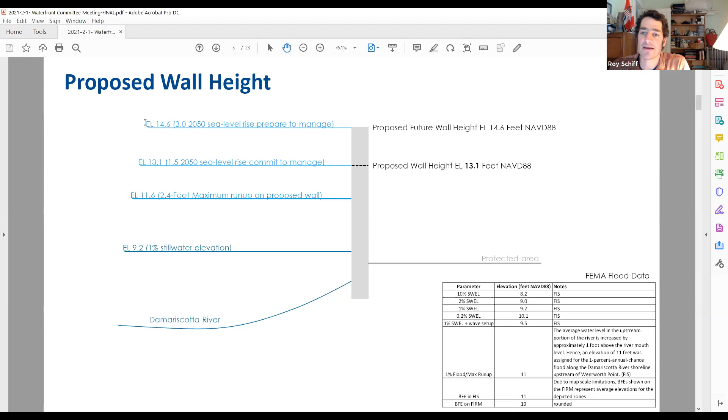And then finally, we have elevation 14.6, and that's a 3-foot sea level rise, the high level for 2050 prediction. We've talked with Pete, who's on the phone, as well as others, and these are the management levels that the state of Maine is looking towards adopting. So our thought is that maybe the wall could be extended to that height.

Okay, next slide. So there are many requirements to building a wall, and I wrote the word levee in parentheses because in FEMA world, we're actually building a levee. Not that we anticipate it being an earthen embankment, but because we are designing this structure to remove the downtown from the special flood hazard area. It's a logistical definition, and because of that, we have to meet all of the criteria listed on the right-hand side of this graphic.

So everything on the left is the same. And what you see is, for example, that we need to be 2 feet above the base flood, total still water storm surge, and wave setup, and that's 11.5 feet. So we meet that criteria.

The highest criteria we need to meet is 1 foot above the maximum base flood run up on the wall. So that is 11.6 plus 1 feet. And then with just a little more elevation, we're actually at a 2050 sea level rise scenario that the state of Maine is going to adopt at 13.1 feet. So what we're seeing is this sea level rise scenario really gets us to all the top of the levee and the freeboard requirements that are required for the wall we're proposing.

Jason, if you can go to the next slide. And on this slide, we just highlight the 2050 and 2100 sea level rise elements. This shows that in 2100, this wall could be overtopped if these predictions that the state is considering play out. But if we go with a...

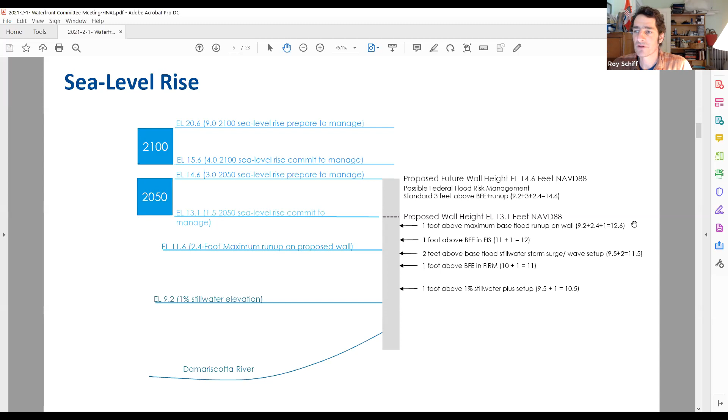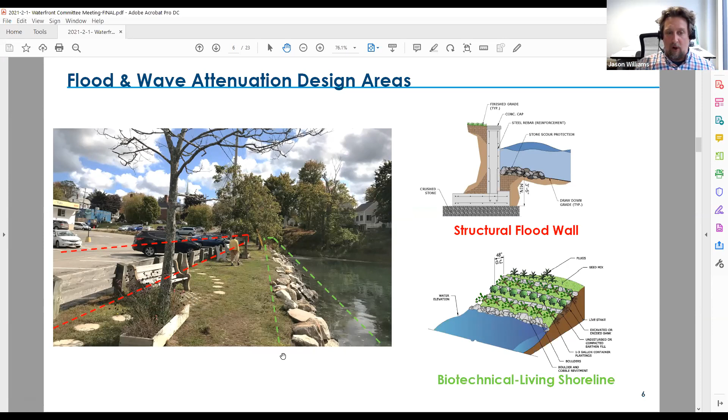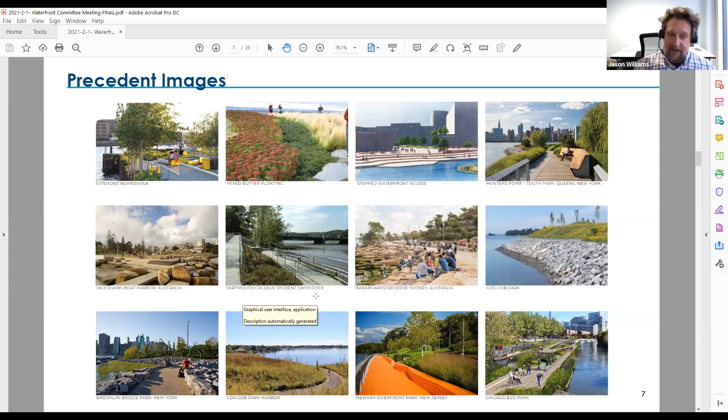Oh, let me try that again. Oops, I'm out of memory.

In all three concepts, we're thinking about how pedestrians are potentially getting to the waterfront. So as somewhat of a baseline, we're using a center line drawing off of Taco Alley and people moving down, also identifying that people could be coming from the west or the east to access the site.

In concept number one, pedestrians coming down Taco Alley enter a small gateway plaza with the relocated or a brand new wayfinding kiosk. As part of this concept, we'd be taking 3 parking areas to create this pedestrian-safe access into the new parklet, but modifying some parking on the eastern edge so that we can create essentially 2 new parking spaces and add a walkway that gets pedestrians onto the area.

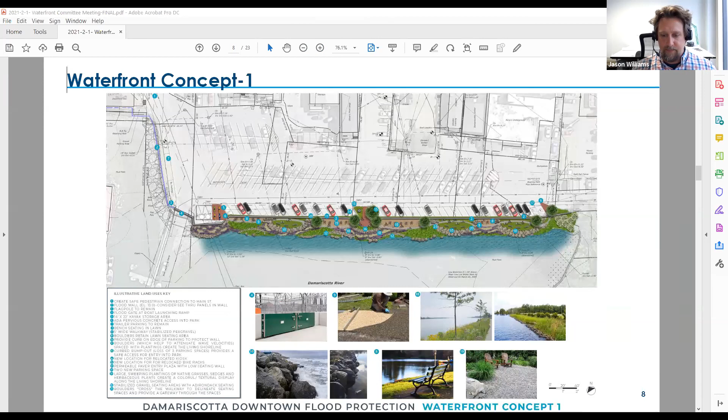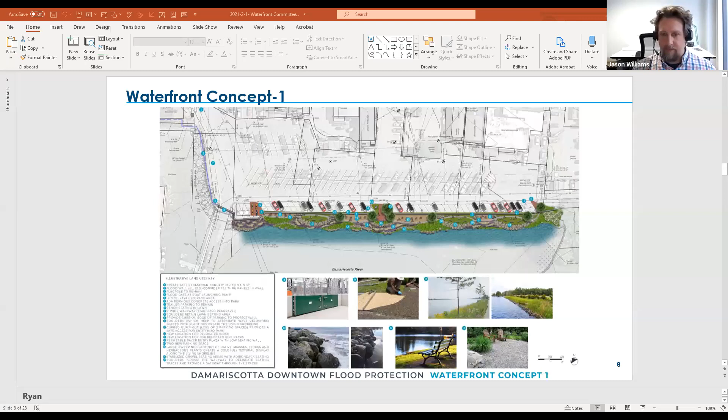So this concept is a really organic concept. It has a lot of movement running around along the shoreline and is primarily made up of an interior walkway, the gray color identified as 9, that meanders along the entire space.

In this concept, we're creating a 3-foot wide lawn snow shelf between the bumper of the car and our proposed flood wall, identified as number 2, which runs along the entire edge of the parking lot.

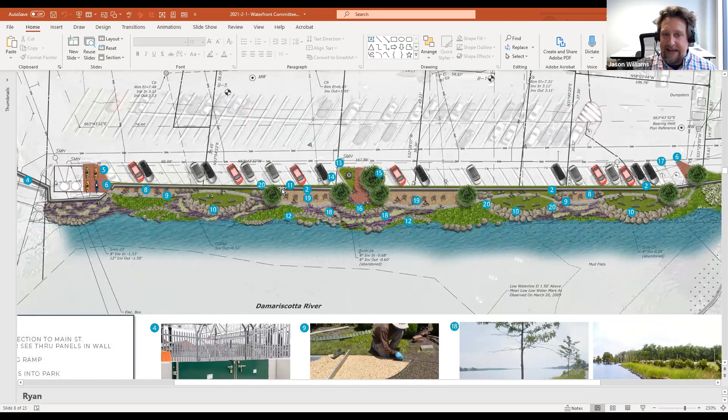The walkway meanders through our parklet and creates essentially 2 different types of seating areas, identified as 19, which would be an Adirondack style seating area made out of stabilized pea gravel, and then open lawn areas that would include benches and picnic tables, very similar to what we have now.

The lawn areas are retained by boulders. You can see here in these pictures, we took some of the design elements of boulder stacking that you see in many situations in New England and wanted to incorporate them into what is now just a boring, low habitat riprap slope.

By bringing in boulders and not going beyond the existing surveyed edge of the existing riprap, we can use boulders to help elevate some of the seating areas, but also some planting areas, almost a lower level littoral shelf where we would allow water to infiltrate in, bringing people closer to the water.

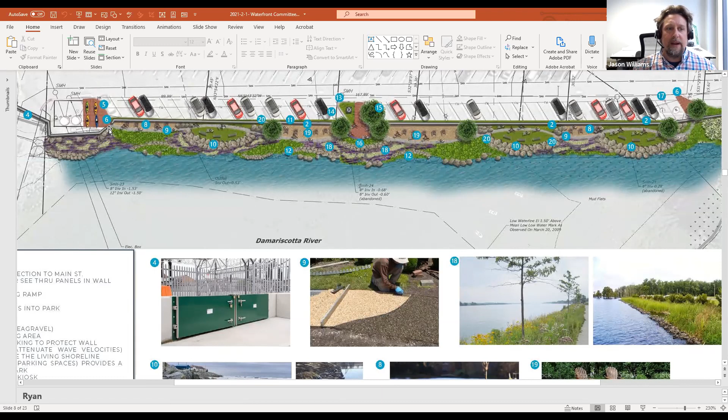Throughout this area, we'd have all native plantings. On the western edge here, we have a new location for kayak storage.

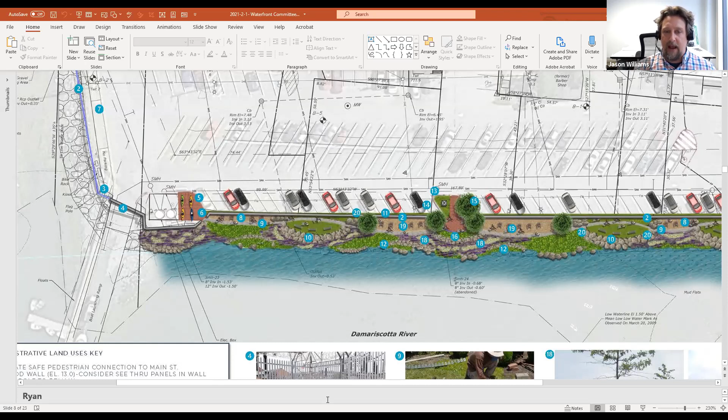Our wall comes around our existing sewage facility with a gate that would go across the boat launching ramp, and our wall moves up along the existing riprap to the north. We'll get into some of the options for that in a bit.

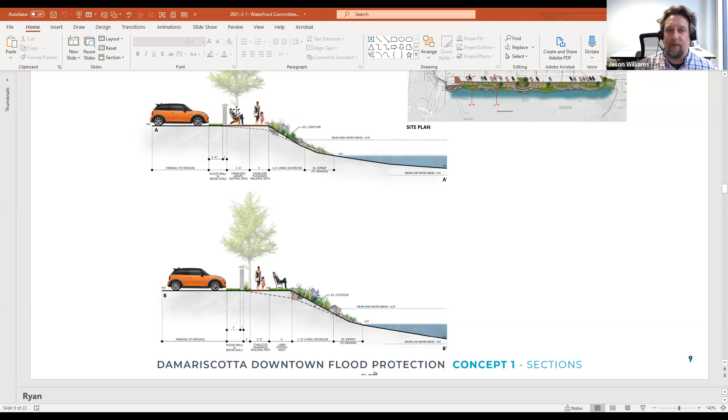If we look at some sections in 2 areas: the top area is the Adirondack seating area just against our 5-foot wall with the walking path in front, boulders retaining our new living shoreline. And our wall and snow shelf with our walking path just beyond, next to the wall, with our bench and picnic table seating area along the water. So as you're walking through this park, you're experiencing 2 different types of seating areas and features.

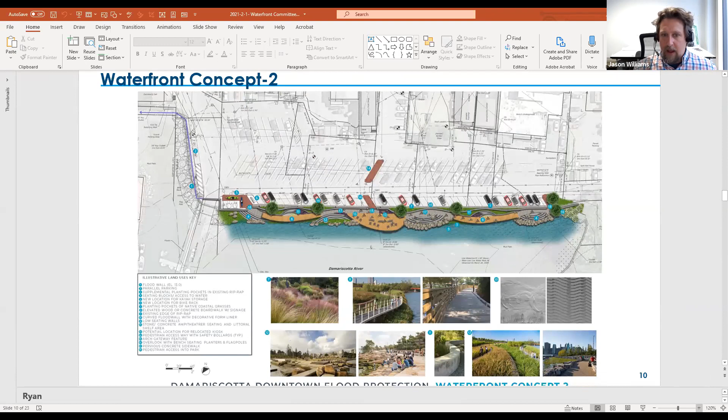If we go to concept number 2, we essentially go from concept 1, which is kind of beginner level, now we're moving into kind of intermediate where we're upping the game a little bit. Again, centerline pedestrian access across 2 parking spaces, which we would take for pedestrian access.

Have textured or colored concrete or asphalt in this area with safety bollards that link people over through another parking lot to an open cantilevered deck area.

This landing area would have an arched gateway area into it, and then identified as number 13, our new location for relocated wayfinding or kiosk, and this really large decking area with different seating elements and flags within it.

In this concept, you can see our wall is curving a little bit, so we add a little bit of movement to the wall, bringing it into the space a little bit, which allows us to create some planting pockets on the parking side of this wall. One, we could help screen the long wall and get some tree plantings in there.

Our pathway runs east to west throughout the park area and goes through stabilized pea gravel or stone dust and moves into these boardwalk features.

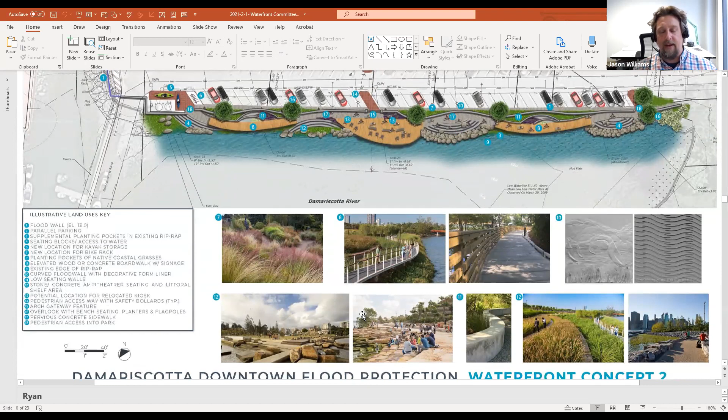And again, we're going to leave you with all of these plans so that everybody on the call can go in and zoom in and see the different elements.

Additionally, just beyond the boardwalk feature, we have a series of small seating walls where you can go and sit just behind the boardwalk as people are moving along the boardwalk and then access down. New kayak storage, our gateway, our gate going across the boat launching ramp, and our wall to the north.

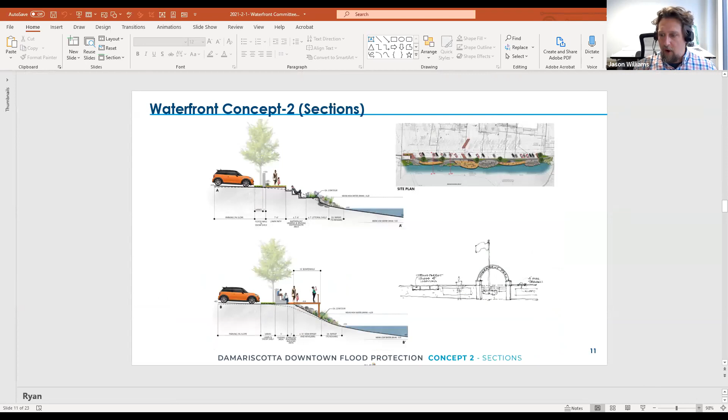Two cross sections that depict the different areas that you'd be moving through with our upper walkway and terrace steps going down to our living shoreline, as well as the seating element that's integrated into the flood wall with a walkway and our cantilevered boardwalk section.

Now on the right-hand side here is, I think, a really interesting perspective. I had mentioned our gateway arch feature and our flagpoles. We would have our interpretive signage at this point.

But again, remember, if we're starting at approximately elevation 8 and we're building up to 13, we've got a 5-foot high wall. Now, there's two ways at looking at this. Currently, you're in the parking lot and you're walking behind cars, and you can see out to the water. You can see the back of people sitting on the benches. And so there's a real integration visually with the parking and our linear park.

Once a 5-foot wall comes up, it's going to make a very clear distinction between vehicular use area and pedestrian use area. Now, we can explore what that means. Positively, if you are in the waterfront park, you're not seeing shiny cars and bumpers and lights. You're really integrated more with the river than with the vehicular component.

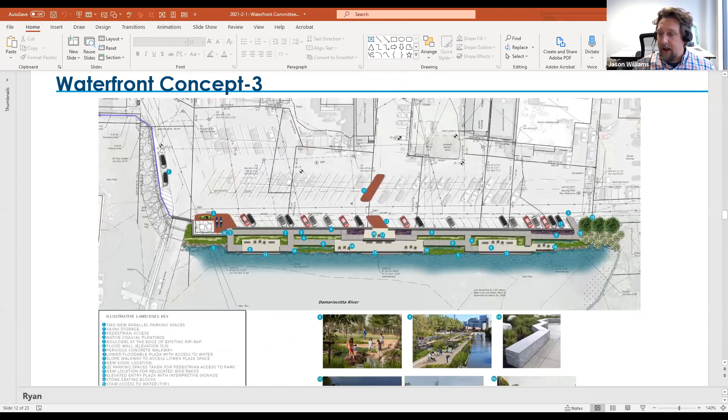Concept 3, again, now goes into a really higher level. In concept 3, we use the same elements of pedestrian safety to get people clearly onto our linear park. We have a straight section of wall that is just beyond the bumpers of the car. So we've removed that 3-foot snow shelf to gain us a little bit more room.

Concept 3 includes a series of level platforms at varying elevations with walkways that move between them on slopes. Because we have such a long expanse here, we would never need handicap railings on ramps. They'd be very, very gentle slopes.

And I just want to show you down here this illustration, item number 9, that shows essentially what concept 3 is getting at, where we have these large opening spaces for gathering and seating, but then these walkway features that move up and down the coastline.

What's really interesting about this is if you do come into our main plaza here, you're overlooking another plaza. If you move to the east here, you're walking down a very gentle ramp in between the wall and vegetation. So you can imagine this vegetation could be a native grass coming 3 or 4 feet up. So you're immediately immersed in the living shoreline.

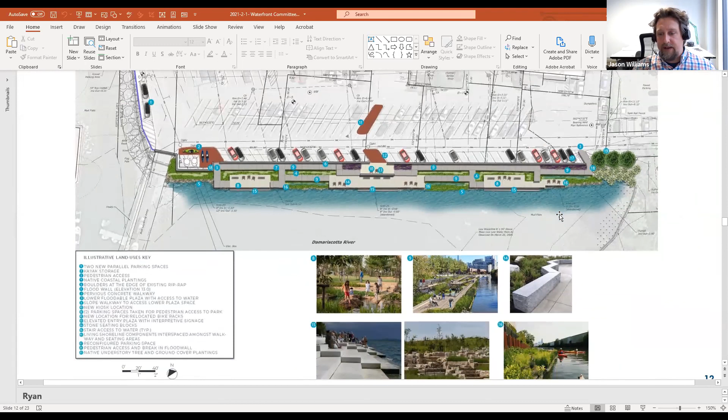For concept 3, we developed an elevation that really gets to the different grade changes. So on the center line here with Taco Alley, you'd come to a main plaza with seating, and walkways would move you down to these additional seating areas. There's a total of 3 of them with steps that you can sit on that go right down into the water. On both sides, the anchoring of our littoral shelves.

And as you can see, our wall element gets taller as you move down. And this provides the opportunity for concrete form liner that could have imagery, whether it's sailboats or a school of fish or whales, that when viewed from the water would be really, really striking.

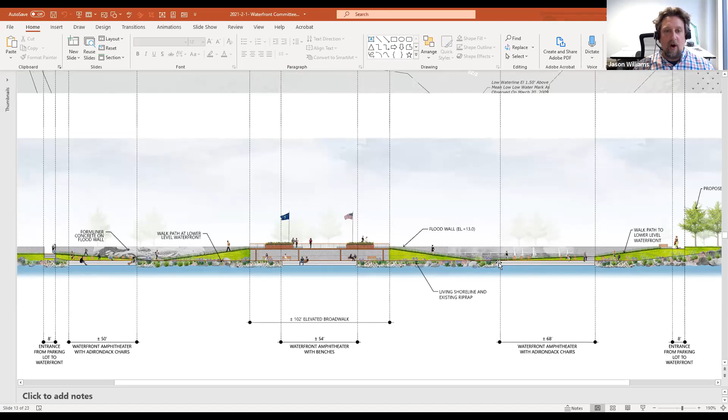And so by modifying the change in topography, we are really getting as much space as we possibly can in this linear park feature here.

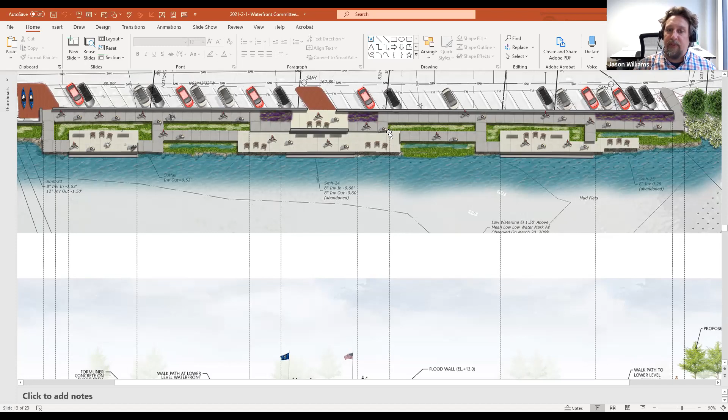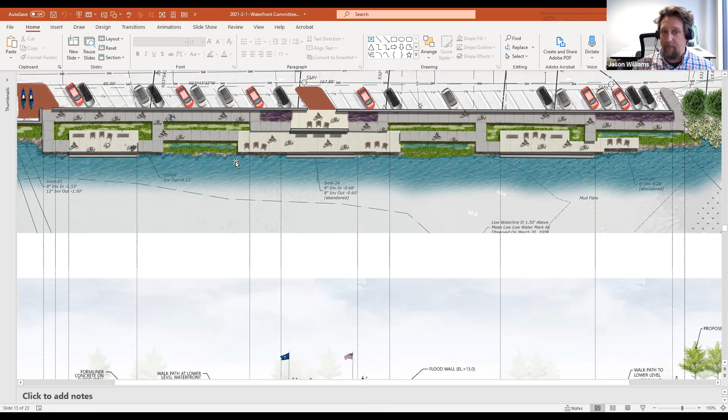One of our thoughts for the plaza spaces would be that all of the piers would be installed on site, and these lighter colored plaza areas would be made up of precast concrete panels that would be delivered to site and craned or placed with a large excavator onto the structural members to support the plaza features.

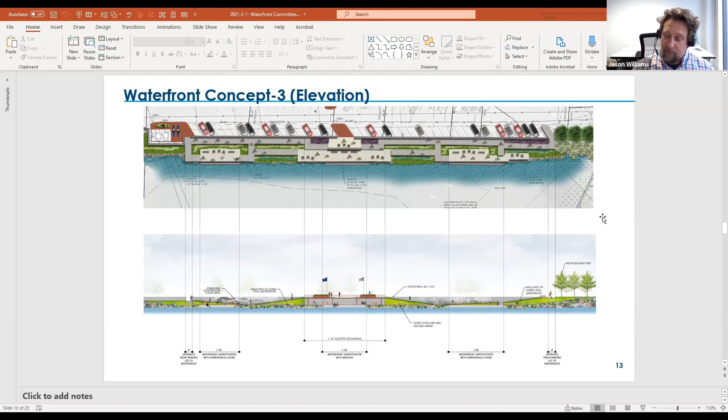There are a lot of elements in all of these concepts. I think the best option for review and comment is to leave these concepts with you, because after this presentation we really need to hammer down which concept we'd like to go with and start moving toward a more refined design and regulatory process.

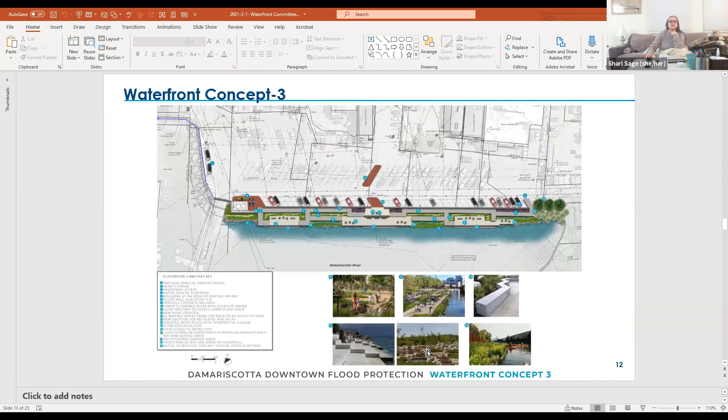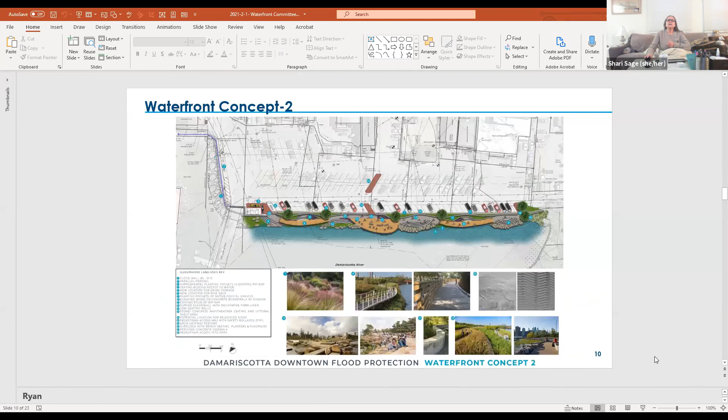Going back to the beginning of the presentation, when you had 1, 2, and 3 design elements, it looked like the first one and the last one had the edge right up to the riprap, yes, more accessible maintenance of this currently already established, plus the build on with the boulders. Number 2, though, with the boardwalk, seems to, from the side image...

Next one, there you go. Down through, I don't know if you can see my pointer, the lady taking the picture. It looks like you're having a bit of - you're inhibiting rather the access to the riprap, which would probably be a bit more expensive to maintain and repair if needed. So I'm leaning towards more the first one or the third one, because I don't want the future expense of having to do something trickier with the riprap.

Okay, great. And also, if I can ask, do you have an approximate percentage? You said the first one is the most cost effective, then the middle one, then the third. Do you have a ballpark idea of how much more it would be to go from 1 to 3? No, we haven't done any cost estimates. But that is something we're going to be looking at.

So there's a lot of factors, and I don't want to get too hung up on costs. But anytime we're adding structural elements into the plan, there's the added cost of excavation, potential coffer footings, and things like that.

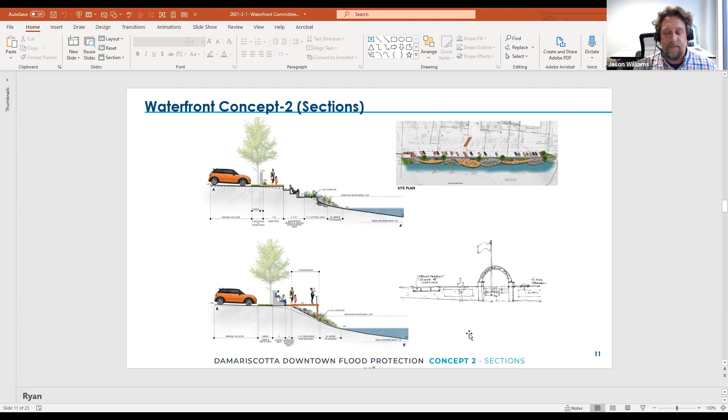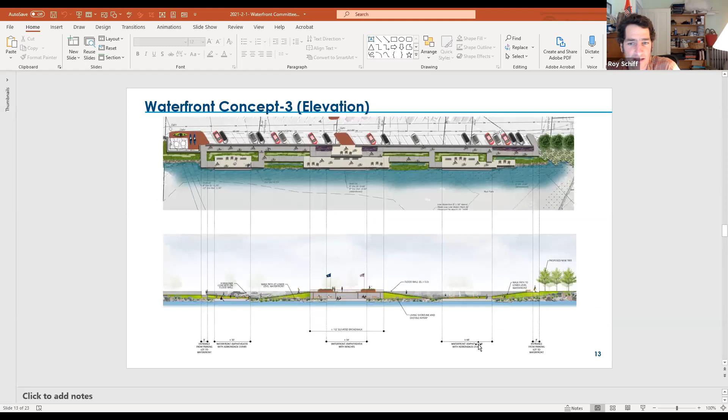Jason, this is Roy again. Not to interrupt, but I think something we always discuss is that you can choose a concept, but you can also pick elements from each concept that resonate with you, and those can be brought back together into another concept. I wanted to share that with the group because that's always happened - in many of our designs we've worked on together, there's a main concept, but then elements from some of the other ones come together.

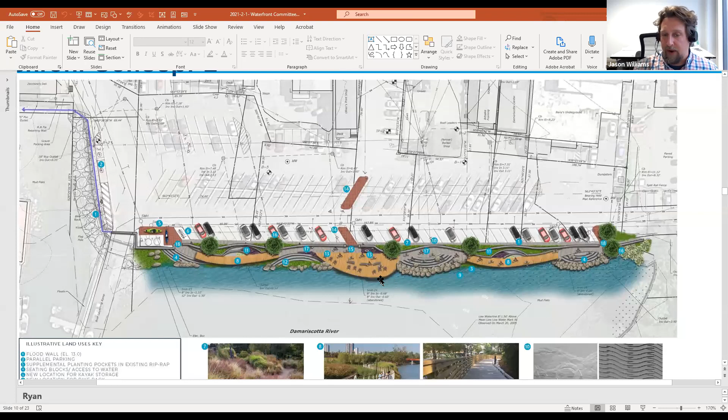Right, like for example, going off what Roy was saying, let's say concept number 1 is really, really liked, but the large entry deck feature is also an interesting element. This deck element could easily be incorporated into concept 1, as well as the stepped amphitheater seating that goes down. Any elements can be merged.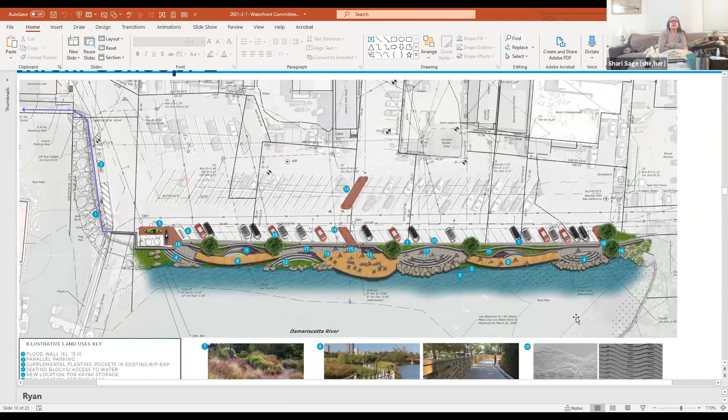Would that deck though cover the riprap? Yes, it would. Obviously you can tell I'm a big fan of not covering the riprap. Because in the first plan, that nice waving walkway that goes from one end to the other - that's a nice feature, it makes you want to take your time, some meandering. Also, I think it gives you a bit more privacy than one large walking expanse. So I would support Shari in that.

I would go further - I would say number 1 is the only one that looks like Maine to me, or comes close to being able to be made to look like Maine. The other two look like metropolitan areas or larger cities. They don't - this one you can almost get lost in nature in it, which is what we expect in Maine. I would go with 1, and maybe you want one feature from 2 or 3, but I would go with number 1.

Yeah, I very much like number 1, it's cheapest. Do these heights, the 13.0 and 14.6, do they match with the heights that are given by the Coast Guard for the heights that are shown on height maps?

I think what you're talking about is the benchmark elevation, or the correct elevation datum. They all go with NAVD88, which I'm not sure exactly what the Coast Guard uses, but all the elevations on this plan are tied to those benchmarks, which are then again mean low water by FEMA. Does it go to mean low water?

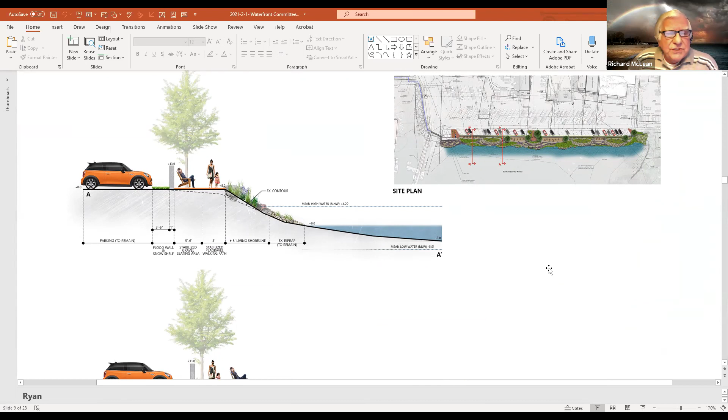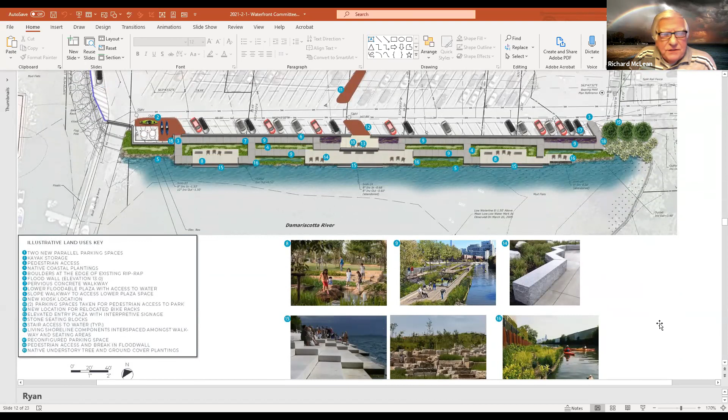Dick McLean has had his hand up. Despite my coming question, I'll say that I really, really liked concept number 1. But for concept number 3, the sloped walkways that you described as being a very gentle slope — if there's any proportionality at all to your drawing, not this one, but you had a different view of it — speaking as someone who was raised with handicapped people, those still look like somewhat difficult slopes for a lot of people.

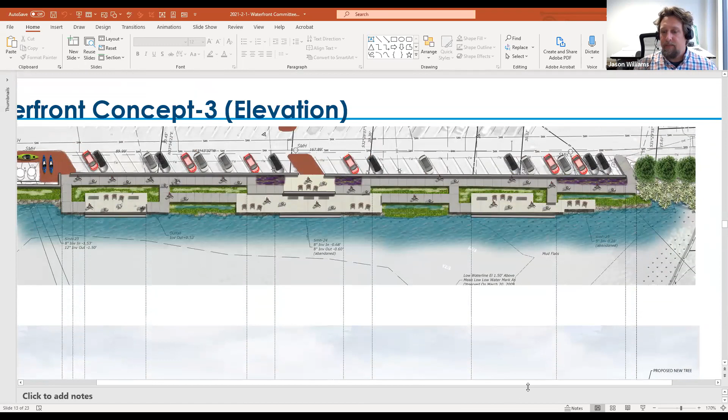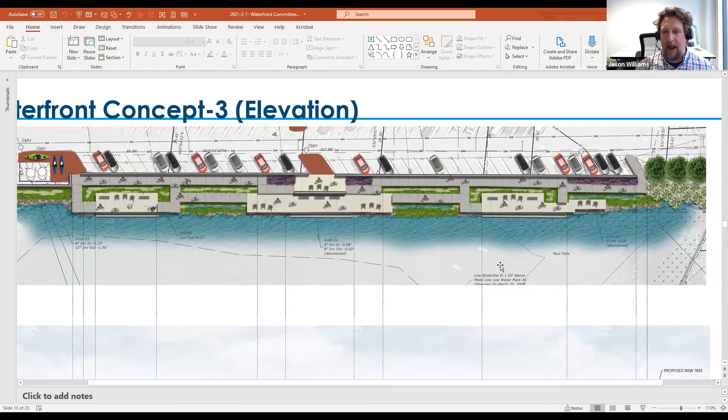Yeah, so the elevations of this would need to be worked out a little bit more. But what I did is I took the plan view, and this is somewhat of a graphic representation. I did grade this area out preliminarily, and we can easily get 3% slopes on these walks that get us to these overlook areas. We would definitely keep it nice and gradual, but you're right, Dick, the elevation is a little bit misleading, and we'll fix that up.

Yeah, well, that's why I asked it that way. Let's just say overall with any of these, I want us to keep accessibility to the forefront. I agree. And looking at the slopes that are depicted in this picture, it looks more like a roller coaster than handicapped accessible. I mean, you look at those slopes.

Yeah, right, but I just didn't know — Jason spoke to it, I just didn't know whether or not that was. I think Jason said that they would adjust that so that it would be handicapped accessible, meet ADA requirements.

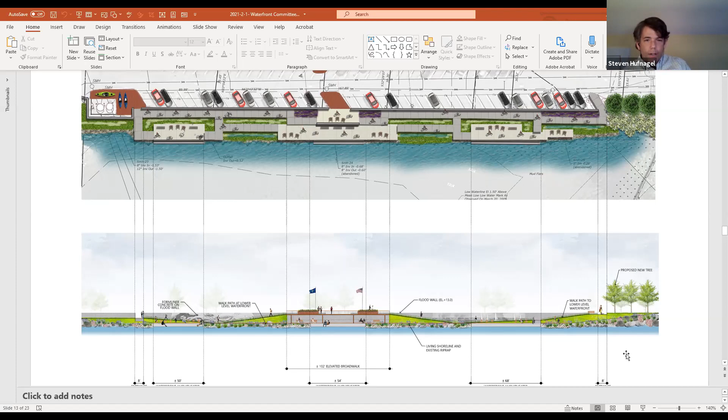I'm going to go to Steven, he has his hand up. Oh, thanks, Matt. First of all, so appreciate the 3 different options as a way to provoke discussion, and I had a few points. I love the idea of seeing the people down by the water and having at least some pocket views in to see the activity. And I like the pedestrian piece of safety getting to the water as well.

So in 2 of the 3, you show the safe islands coming through Taco Alley, and that seems really important. Just as a user of the parking lot, that wall of cars between the main street and the water dissuades people from going down, and having a safe access or through point seems very important.

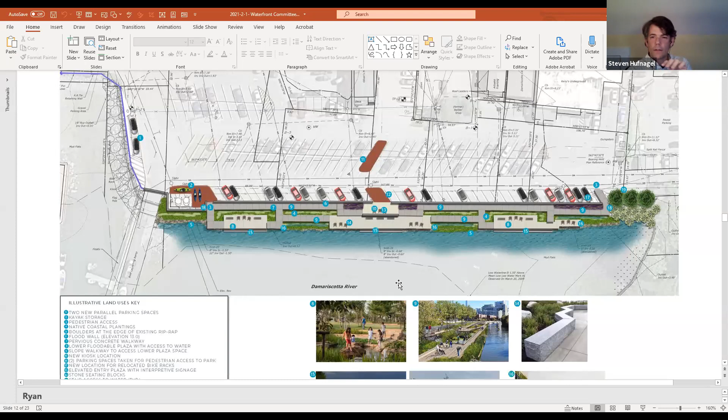Another comment is Misery Gulch — with the wall moving around, we talked about the different options for how to protect the building with the leather store. Is there some way to incorporate a crossover of pedestrian access directly from the parking lot in front? That may be something that was ruled out long ago, but way in history we talked about some pedestrian connection across Misery Gulch. And if construction's happening, is there a way to connect a pedestrian crossing from the parking lot over to the schooner landing as a piece of it?

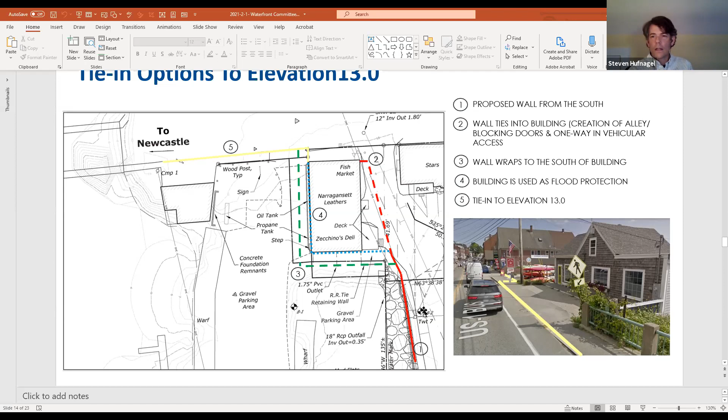And finally, in the 3rd drawing, just looking at people and what they do down by the waterfront, where I spend a lot of time, especially when it's ice cream season — people want to get to the water, so they go down and walk on the riprap, and that's currently somewhat dangerous. I think one of the design elements I really appreciated was the steps down to the water, because people want to look in. There's a toddler who wants to walk down with their parents and check out the horseshoe crabs that are assembling. So some way to safely get people down to the water in a stepwise fashion seems valuable. So just a few comments that pull in a few of the elements.

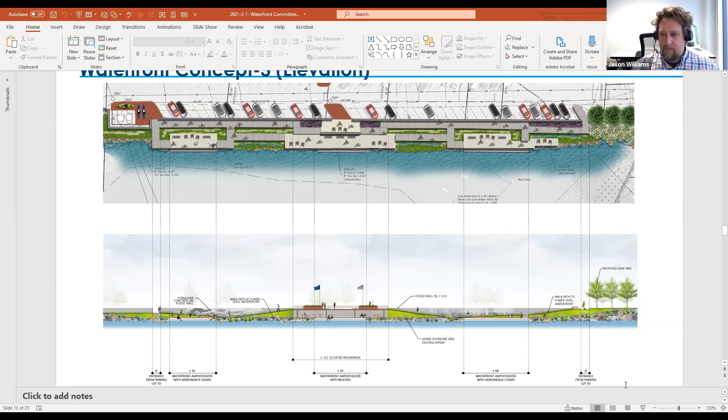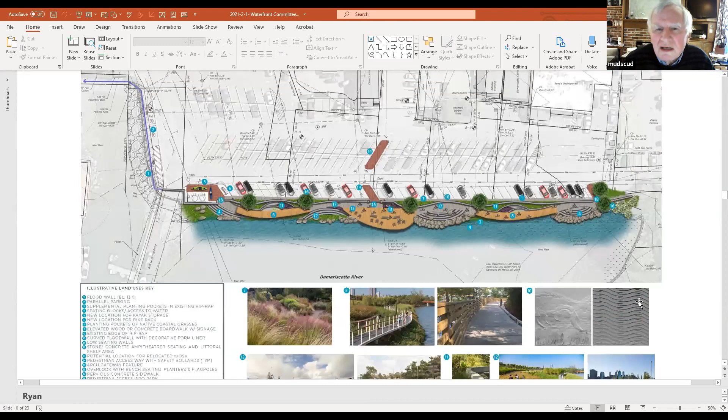I like the steps down — the steps down to the water are nice, but they're gonna be expensive. I don't like a wooden boardwalk, we'd have a maintenance problem.

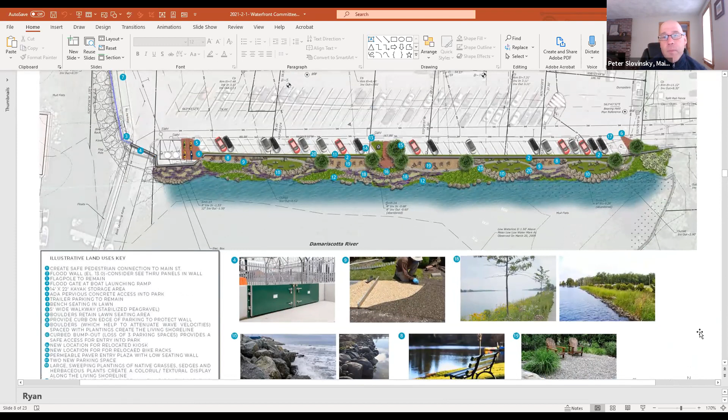My second question, and this might be getting way too early in this, but are you folks proposing that the riprap that's there would be reused to create some of these walls, or is it inadequate sizing to actually do that? So those are my two comments and questions.

Gotcha, thank you. Dick? I think Steven threw out a word that reminded me of something I should say out loud—he used the word icing. If you gentlemen haven't been here in the winter, and this winter isn't doing it, once a gross design is selected and you start getting more finite in the designs, just be aware that in this harbor we can get ice floes pushed up hard against the ground. I'm not talking about sea level rise—I'm just saying be aware that stuff right down along the edge could get chewed up in a hard winter.

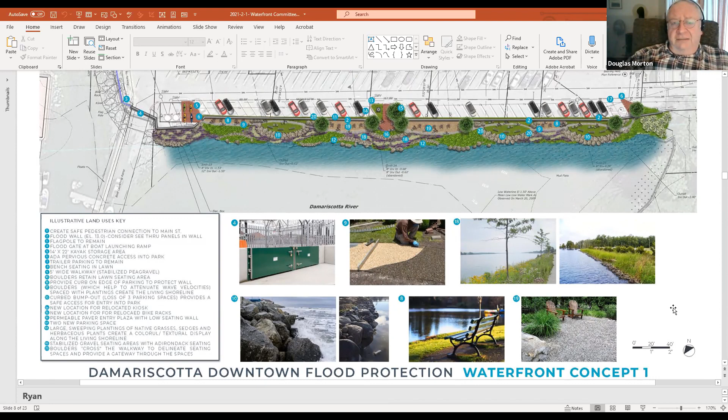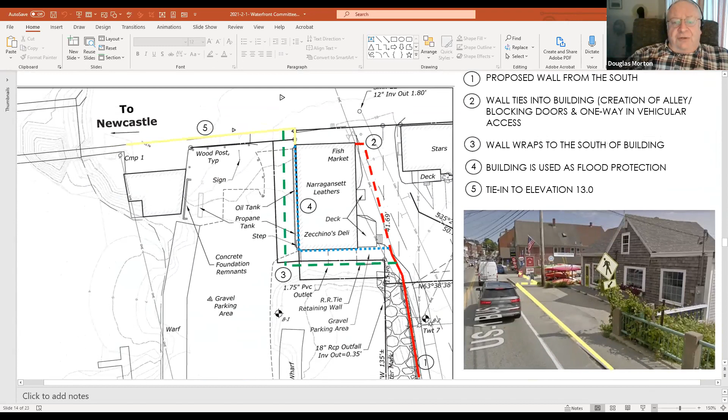Then if you go back to the wall demarcation efforts there, the only thing that concerns me is, if we all remember the history, we decided the walkover probably was not a good idea politically, if nothing else, because it's servicing a private place. I know nobody's going to love me for this, but aren't we doing the same thing with the green line here?

It's obviously going to cost us more to do that. And if we did the dotted line that's right against the building, that's pretty cool. But again, we're favoring that building, and that building is a piece of private residence. The town doesn't own it.

Your thoughts on that? Nor does the town own any of the buildings along the south side. That's correct, but that's my point. We do own the parking lot though, and that gives us the right to do what we're doing without getting into conflict of interest with private parties.

The other point on that, and Alan can respond as well, but I like the idea of the walkway behind the Narragansett Leathers building, just because it reduces the pedestrian traffic on Main Street and a very bad intersection there with the driveway and the Main Street sidewalk.

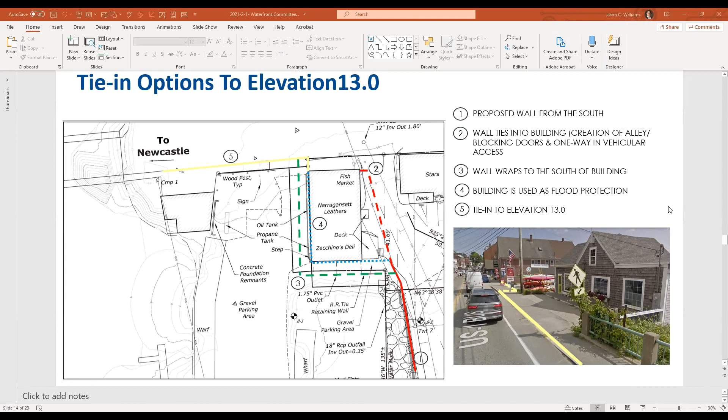Yeah, I think when it comes to the parking area, we're going to be looking at all of the grades in here and what the options are. Obviously, if we raise grades down here, we've got to rebuild a section of the ramp, making it steeper. So that is one element that we're going to have to look at.

But really, can we take maybe this drive aisle? You can imagine saw cutting the asphalt, blending it in on the east and the west, and raising this parking a little bit so that the cars are sitting on a 3% grade that then has a curb that gets us up another 6 inches. And as we move into the park, we're up now potentially 12 inches. All of that we're going to be looking at.

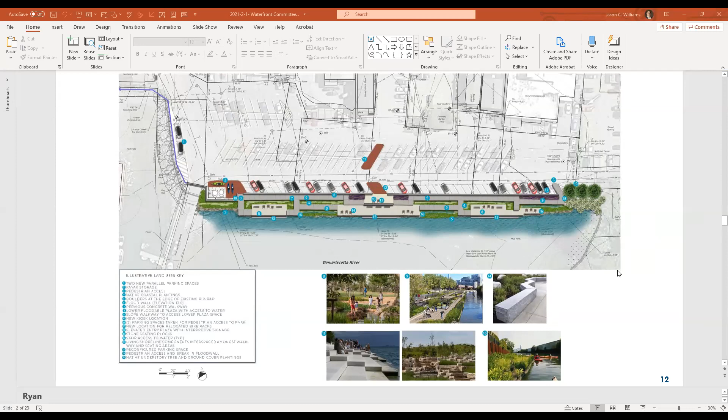Okay, and I know that's part of the discussion that's going to continue after a couple more questions here too. Max and then Bob.

Well, I'll try and be quick then. I'm not part of the committee, so I don't know how much my input will be taken.

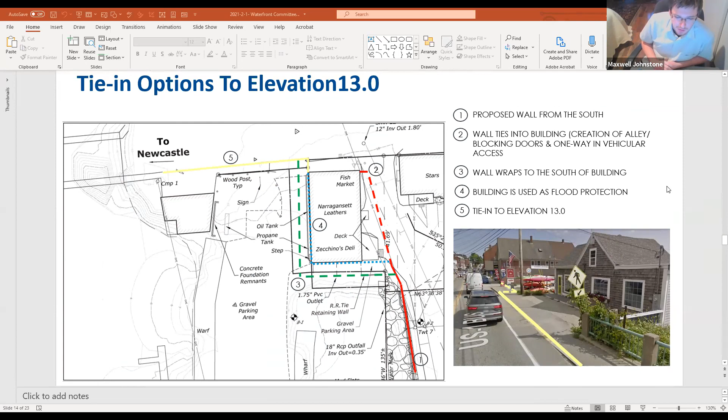But what I was going to say was, first of all, I like concept 1. That's me as a resident of Damariscotta. I like that a lot more. I feel that's a lot easier for people to walk on and still have that same type of feeling as they do right now.

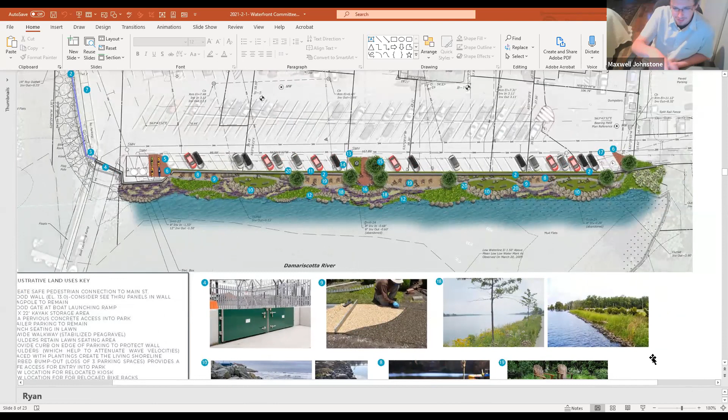And then just a little tad personal thing - I think on this one, if you scroll down just a bit, didn't you have seats in the walls or something? Yep, that's part of concept number 2 right here. Yeah, that one - that's just my own personal thing, get a few more seats there. I think that might be good, but I'll leave that to the committee for what they want to do on that.

The other thing I was going to say, whether it's the green space we're talking about over here or the wall for the gulch area, for me that all comes down to cost, just because of the project as a whole. We have the set amount coming from the EDA, and I'm just always that cautious guy - I want to make sure we're in budget. I don't want the town to be spending a lot more on that.

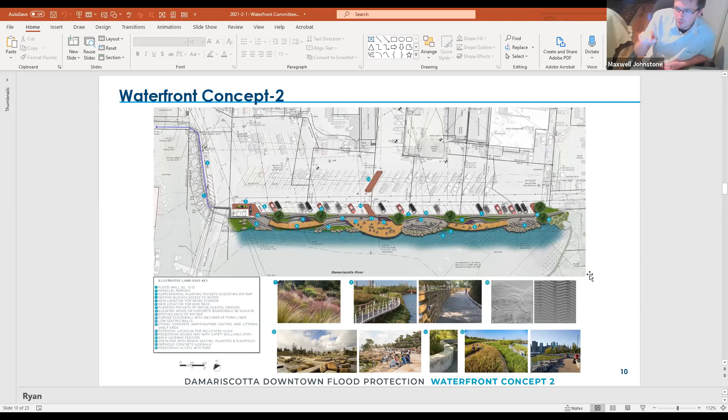But the other thing I wanted to get on was what I was actually talking about with the wall going around the business. I get it, it would be great to just protect all the buildings in the flood zone, I don't know. Me being a bit ignorant, not being at all these meetings, but has anyone spoken to the owner of this building, or is the owner of the building in the meeting right now?

Yeah. Yeah, the Leather Building is owned by Alan, who's on the call right now.

Okay, I didn't know what Alan's thought was on this, and I agree with Doug. We're doing this big federal project to kind of protect town-owned land, and now we're carving out just to protect this one specific building. We didn't do the north parking lot because that was going to be privately owned and used. We didn't do it for all other spots, so I'm for one a bit on the fence of using these funds to also give protection to this one specific building. That's just my opinion.

I'll let Alan respond too, but I just want to note that we're not trying to protect the asphalt parking lot, but we're really trying to protect the buildings adjacent to the parking lot in the southern part of our downtown. Alan, would you go ahead?

Yes, I'd like to remind everybody that the red line, which leaves us out, is also on our property. Right, we own half of that alley. That's right. Yeah, the dashed black line that you see on that design drawing is the boundary for the town versus Alan. So it splits things up - you have no choice but to go onto our property no matter what you do.

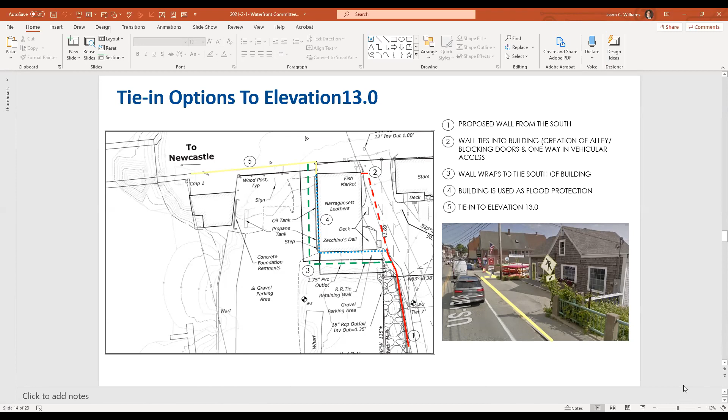Dick and then Stephen. Way back to when I was on the Board of Selectmen, and we were really starting to look at issues—while, like everybody else, I'm concerned about being able to preserve the parking lot, and it's important, its importance to us as a town. My graver concern has always been the buildings along the south side of Main Street.

That they're at this point seriously in danger of what will come from rising water. And the minute that those buildings are in danger, we've got, to me, an unreconcilable economic disaster on our hands. One of the reasons I've not at all been appalled by the cost we were looking at to get something done is that, to me, it's greatly less than what would happen if we had to abandon a big swath of the south side of Main Street.

And so that's my focus. In the process, we protect the parking lot, and that's important, but we need to protect the south side of Main Street. Thanks. Stephen? Dick really said it better than I would have, but what I was thinking is just to say we're investing in the future vibrancy of downtown, which everything else financially hinges upon. So including more buildings in the envelope of this thriving downtown, and keeping that going longer, is all to the good of our success collectively. Very good, thanks Stephen.

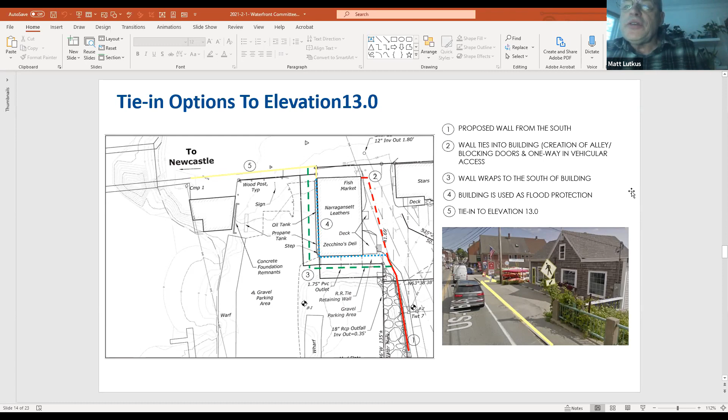Jason, let's move on, why don't you continue? I'm going to turn this slide over to Eric Teale, our geotechnical engineer.

The depiction to the right of this test boring location plan gives a rough idea of what the borings have encountered. In general, along the seawall line there, along the riprap, what we have is between 10 to 14 feet of sand, silt, and gravel fill material. It's miscellaneous fill that has been placed there over the years, but the bottom of that fill material appears to vary anywhere from about elevation -2 to elevation -5, roughly.

And then underneath that fill material and some of the silty material with organics in it, we have these marine clays. Now these marine clays are very soft material, highly compressible. We've found those below the fill at depths of about 10 to 15 feet in thickness. What that means is we've got a reasonably thick layer of highly compressible soft clay material.

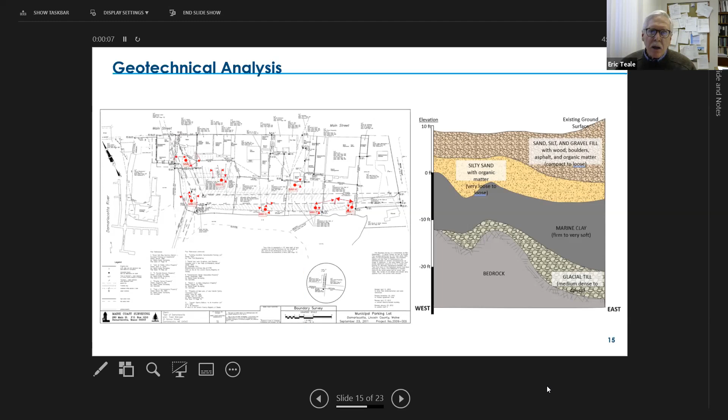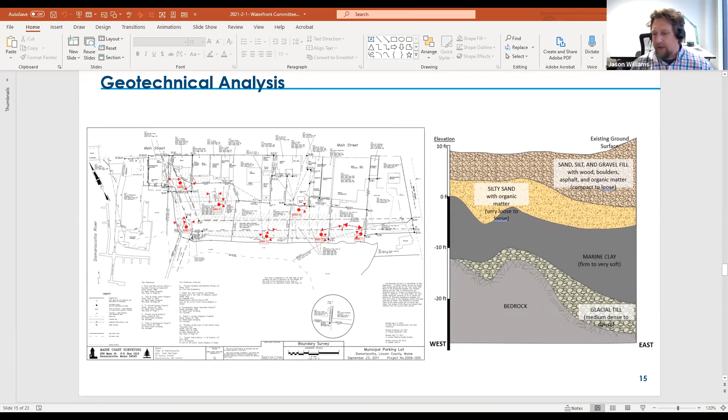Jason: I can go into the implications for the seawall, did you have? Yeah sure. So we developed four concepts for proposed seawalls. Eric and myself worked with our structural engineer, Kishore, to develop these wall options. And I think, Eric, what would be good is an explanation as to why we need to go so deep.

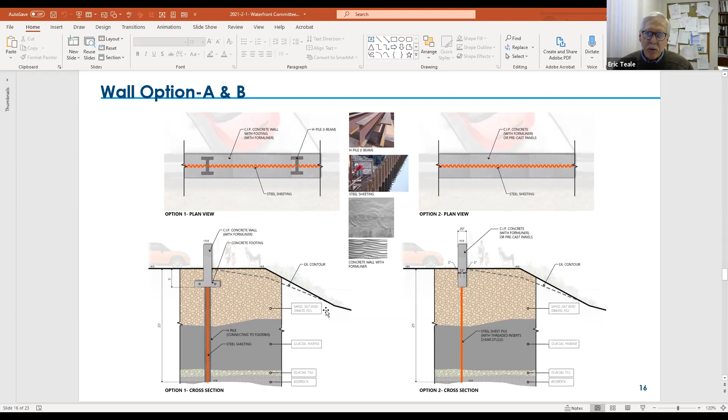Sure, so there are a couple of implications based on these subsurface conditions. The upper granular material, the fill material, has a variable amount of silt or clay silt mixed in it, but it's basically a moderately permeable soil, so that during flood conditions, as the seawall keeps water off the parking lot, in essence it becomes a dam. And we have seepage forces - water wanting to pass underneath the wall, underneath the footing of a wall, and then create uplift pressures underneath the pavement on the land side of the wall. It's just an unbalanced load of hydrostatic forces.

So the first thing you look at is, well, how do we cut that off? We can take our foundation for the wall and drop that down into the upper foot or two of these soft clays, because the clays are, for all intents and purposes, impervious material. Water's not going to go through that during the duration of a storm event, so we don't need to worry about that.

The only problem is the soft clays don't provide any vertical bearing capacity support for us. So then what we have to do is take our foundation element and carry that down until we get into the glacial till layer, which is proximate with the top of the weathered bedrock or the hard bedrock. So clearly we're not going to dig an excavation that's going to take us down somewhere around 21, 25, 26 feet below the existing grades.

So normally what's done in a case like this is you drive steel sheet piling. Steel sheet piling, the interlocks are sufficiently low permeable material, and so that gets away from the problem of having seepage forces going horizontally underneath the wall and then up and pushing up against the asphalt in the parking lot. And the steel sheet piling also gives us vertical support because the bottom of the sheet piling would be down in the till or the weathered bedrock material.

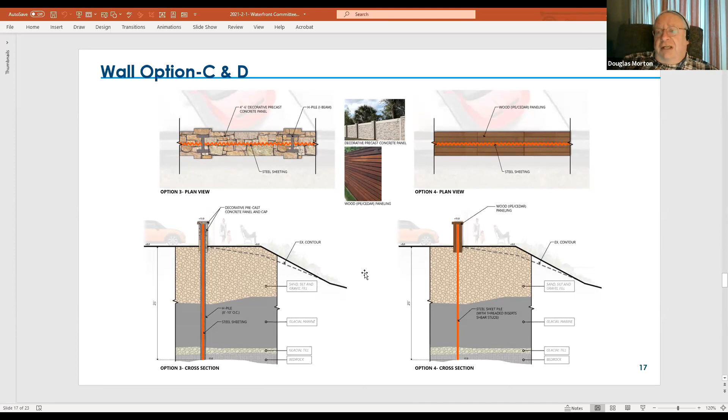Sorry, can I ask you a quick question? I know that I put out a bunch of information about log-type temporary fixtures that would bring the height up during storms and be removable during non-storms. Looking at your center picture with the gray wall, it would seem almost perfect to me if those vertical stanchions went up another 1.5 feet—you could easily drop the logs in there when needed and remove them when you didn't need them, thus keeping the overall height of the wall much shorter with just the stanchions standing higher. What's wrong with that thought?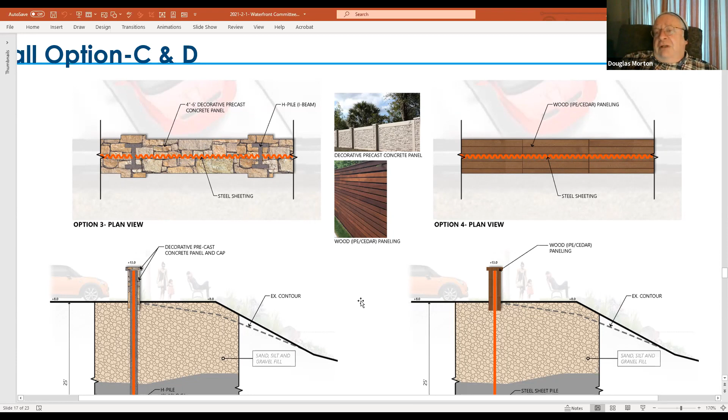So what you were saying is maintain the columns coming up. Maybe we have half a seating wall, but then put in upper panels that slide in during that. That's definitely an option—it's essentially like putting a weir board in a spillway of a dam. And that seems—we're all talking about the aesthetics of this high wall. It seems like that's a very good solution, because more often than not you wouldn't need them, but when you needed them, you just drop them in. Comments on that?

I think that's definitely something we could look at. The one thing aesthetically we just have to be careful of is how high these columns are sticking up in the air. I'm sure you've seen this before in a residential area, where somebody has designed columns for their driveway with a wall next to it, and the columns are way taller than the actual wall. Right, it looks silly. It does, but we're talking essentially 1 foot to 18 inches to keep that height below 2.5 to 3 feet instead of 4.5 feet.

Okay, I'll just hop in real quick. Roy might have more to say about this too, but one potential concern would be FEMA certification of it as a levee, where every time you add one more piece that needs to be manually installed or uninstalled before a storm, it adds one more complication from their perspective in terms of making it certifiable. Having a couple of gates to allow pedestrian access or cars to get through can be okay, but having like a full length of wall that you have to install every time would present challenges with getting a FEMA certification as a levee in order to give that.

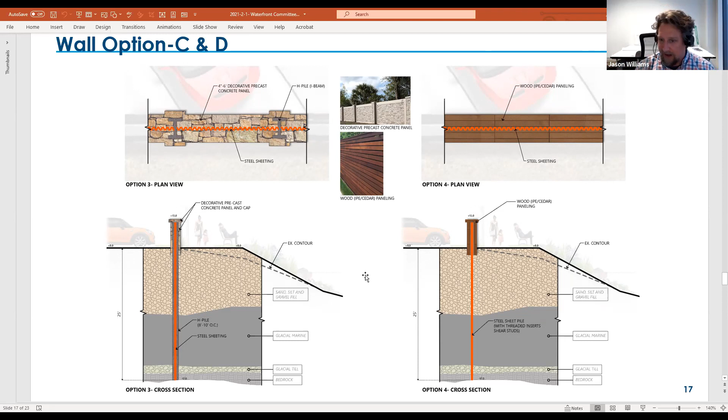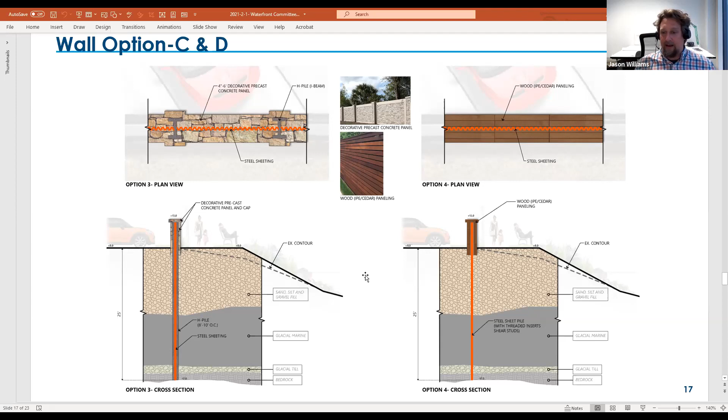Jan, go ahead. So one of our thoughts was, if we do have this pocket feature, remember it's going to be very tight in there, it's not going to be this loose wobbly thing. Can that be mechanically, hydraulically raised when the time comes? And the answer is yes, but what are the costs associated with that? Which are going to be a lot more than just pulling up a weir board. We've got mechanicals that we've got to worry about, obviously all the electrical runs, we've got safety concerns. What if someone is sitting on this portion of sunken wall and this thing malfunctions? I mean, I think there's a lot of things to think about.

And I think too, Jason, we had talked about hydraulically driven, meaning water driven, gates that could be below grade, for instance, at the boat ramp. Once the floodwaters got up to a certain elevation, it would inundate this underground structure and then float a gate up into place. Those are available, and there are several manufacturers of those.

But there's concern in this particular application because of all the salt that we use, sand, things like that in the wintertime, ice that might be on top, things like that. So for the automatic system that's driven by the water coming up and floating up a gate that would be in place at the boat ramp or one of the other openings, it might be a little bit problematic—how does it really work?

I'd just say, I think George had the perfect solution there with a drop swing gate. You just lift it up like the back of the tailgate of a pickup truck.

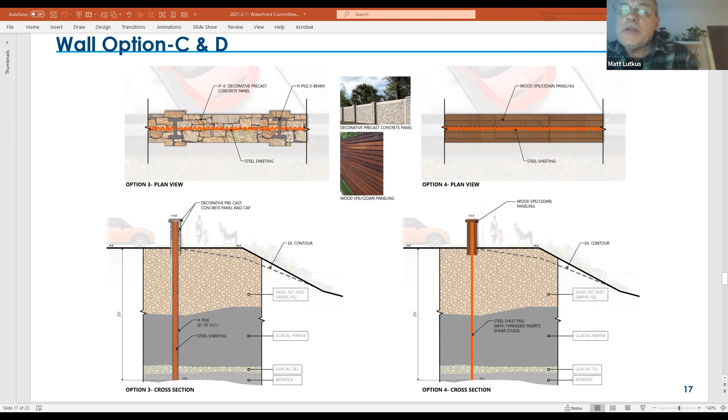Okay, good. Yeah, that was a good question, Shari, because we did talk about that a while back. And Jan still has a presentation on the drainage portion of the project, the storm drainage portion. So I'm going to turn it over to him for that.

Thanks, Matt. One of the other things that we've looked at is what happens during a flood event where you've got this barrier and you've got rainwater falling on the parking lot, and obviously you don't want that inundation of water to then flood the parking lot and flood your buildings adjacent to your parking lot.

So what we've done is we've looked at the parking lot and modeled that. We've looked at putting Tideflex or one-way valves on the outlet pipes from the storm drain system that go out to the river, so that when the water levels in the river rise above the water level in the catch basins, the water doesn't come back in, it stays out there. But in that situation, water can't flow out of the catch basin.

So what do we do? We looked at a couple of solutions: one, to store the water underneath the parking lot during those tide cycles where the water's especially high, or pumping the runoff water out during those rain and storm and flood event situations.

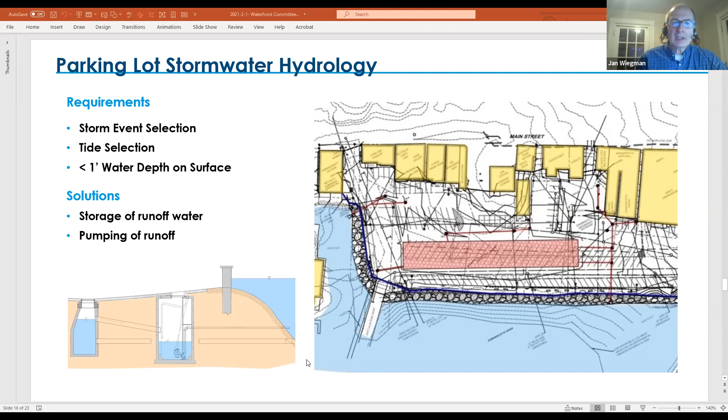So this is some of the result of the modeling we've done with the stormwater. We feel fairly confident we could design an underground storage system that works by gravity. It would require some maintenance, as any storm system would, but it generally works by gravity and doesn't rely on pumps and other things. We'll also do more work to find out what the pump system costs versus this one, so we can understand that comparison.

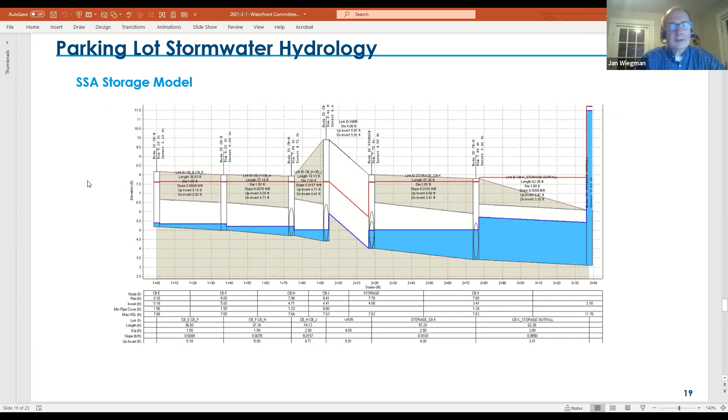We've also started our utility review and discussions with Tidewater and CMP for trying to locate the utilities underground. Some of their initial concerns have to do with whether their infrastructure will be flooded during these flood events. We need to demonstrate to them that that's not going to be the case. We're also talking with Tidewater about the feasibility of locating Wi-Fi equipment in the parking lot. One challenge is if we don't have utility poles to locate that material on, how do we locate it? It may be light poles at that point or something else. But we're working through those issues.

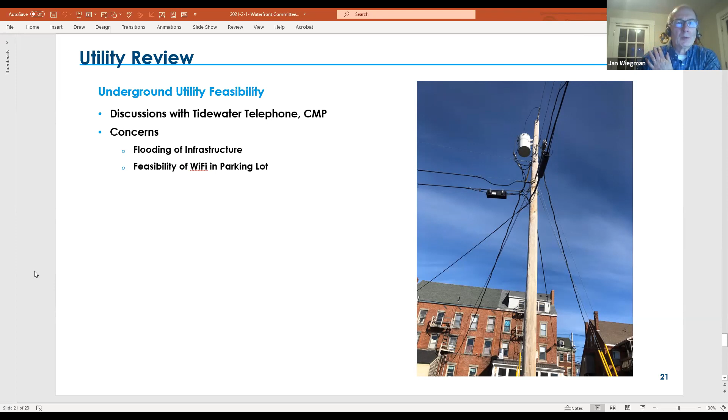For our next steps, we're proceeding with engaging the regulatory agencies regarding the environmental permitting aspects of these solutions, especially along the water, as well as FEMA, to make sure what we're designing will meet their requirements and is something they can get behind. We expect to have a pre-application meeting later this month with the Department of Environmental Protection, the U.S. Army Corps of Engineers, and supporting agencies like the Department of Marine Resources and U.S. Fish and Wildlife, to introduce the project and get their initial feedback on potential issues and concerns, so we can factor that into our feasibility and decisions moving forward.

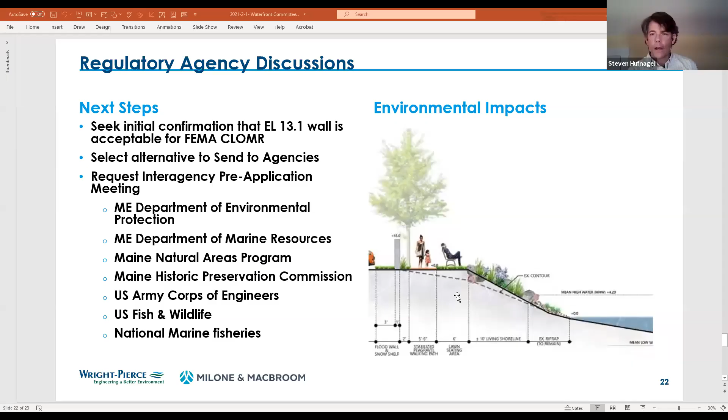Steven said: Thanks, Matt. Jan, as you're looking at the drainage, I'm wondering if that might present an opportunity for filtration as well for the outbound water, given that there are a lot of oyster seed raised up in this area, and ways to improve water quality, even as we're managing the storm runoff and containment of the stormwater.

So that's both oil separation, sediment, and heavy metals. Yes, there certainly can be those types of opportunities, and right off the bat, the oil separation is one that can be handled relatively easily inside these catch basin structures and so on.

Filtration's a little more difficult in that we don't really have space. Typically you do filtration in a basin of some sort, or you could do it underneath the parking lot, but that's also a relatively expensive alternative at this point. But we could certainly do initial oil separation and keep solids and floatables from entering the system beyond the catch basins.

We'll definitely want to keep that in the discussion as we go forward. To the maximum extent possible, we want to eliminate any runoff pollution into the river from the parking lot. So let's keep that in the forefront of the discussion.

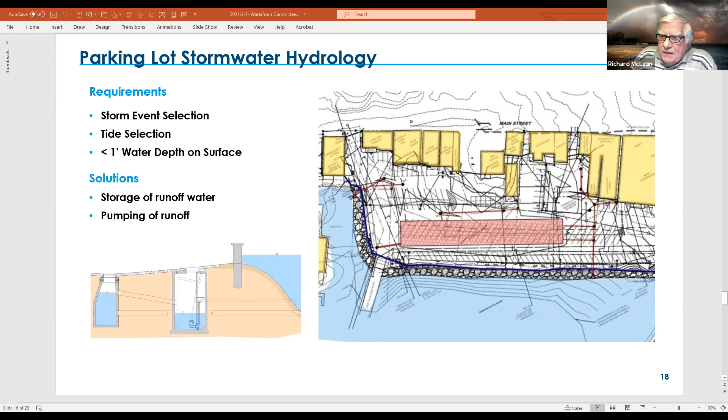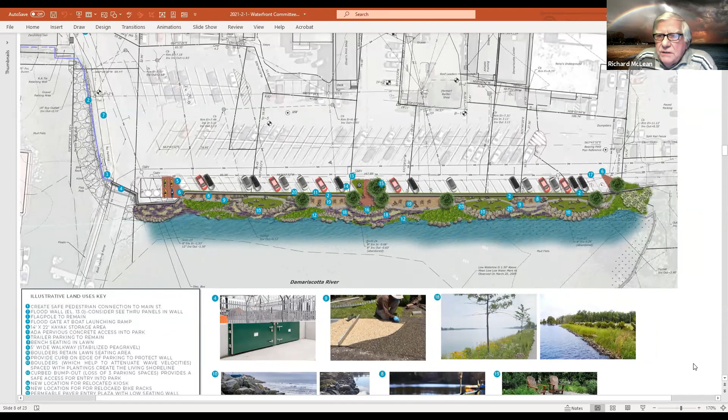I'm just going to throw in one last thing in favor of park design option number 1. Several years back when we worked so hard to survey the citizens about what they liked about the town and wanted to retain, one of the big things was the town's connection to nature. I feel option number 1 keeps us much more in that realm than as we get to 2 and 3 and start throwing in more and more artificial structures.

I want to second what Dick just said, but I also want to strongly support what Steven said. I felt Jan was not sufficiently enthusiastic as I would have liked him to be, but the filtering of that water, the cleaning of that water, I think is essential for the environment of the Damariscotta, and I just want to underscore that.

We can certainly look into options as part of the overall project that would provide some filtering of the water.

Right now we have people tracking the quality of the water in the river constantly, and the place where the water is of the lowest quality is right there in the harbor, and we need anything we can do to clean it up will be welcome.

Doug? Sorry, I was contemplating the water issue. What was I going to ask you? The moment has passed. Well, let me just say this went through my mind, and I don't really want to waste a lot of time with it.

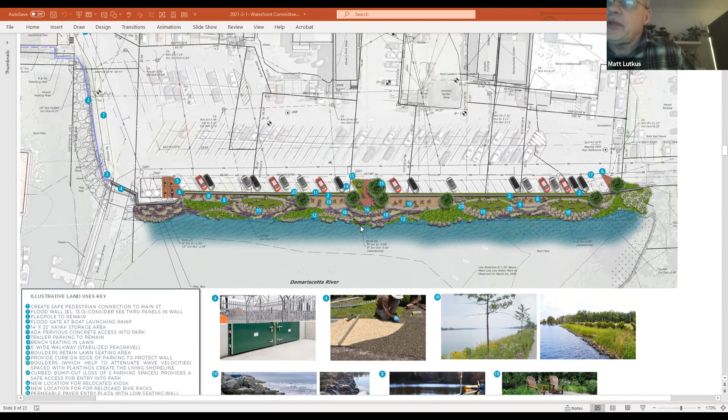It likely is, at least from the outside where they connect, because currently it's all done by aerial and what have you. So, I think at a minimum, what we'll want to do is have the conduit installed. I hope that at the point at which we're ready for construction, though, we do have that sorted out. So, even if we had to resort to the utility lines being run up the side of the buildings, at least we could remove most of the utility poles, not all the utility poles, from the parking lot. But that's definitely something we need to work on, and we need to look at those business connections again and see what has to be done there.

So we're about at 2 hours here. This has been a fantastic discussion. What I'd like to suggest is that we not try to make any decision right now, but Jan is going to send us a PowerPoint or PDF file of these various concepts. And what I'd like you all to do on the Waterfront Committee is review them over the next week, and we'll have a meeting. I'll try to schedule another Zoom meeting in a week, and we can maybe nail down what the committee's preference is with regard to the concepts that Jason described for us. And then from that, they'll be able to go, Wright Pierce will be able to go to FEMA with a tentative design and start that dialogue going. Does that sound okay? Well, if anyone disagrees with that approach, maybe speak now.

I'd like to say out loud, if I may, to the engineering team, thank you very much. This, for me, has been one of the most helpful presentations we've had through this whole process, and very well done. Thank you very much. Hear, hear. Well said, Steven. Yeah, no, bravo, appreciate that.